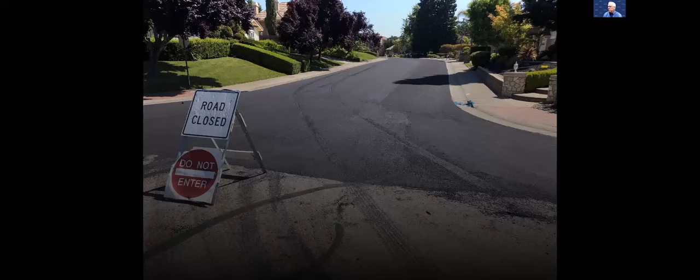This is one that should have been barricaded off completely. You've got a road closed sign out there and the do not enter. Not good. Looks like the BMPs are in place, which is good for the drain, but somebody was on the inside and the tracks are coming out. So nobody went from the outside in. They were on the inside of the project and came to the outside. You can tell by the track. So this is another one the contractor's going to have to fix and make sure it hits the punch list.

So striping. This is also part of the project and inspector's responsibilities. So read the specifications for proper striping. And some people are thinking, well, striping is striping. It's usually thermo or it's paint. Well, what is it? Is it thermo? Is it paint? Is it tape? Is it sprayed on thermo or extruded thermo? Which one is it? What about temp striping? Are you required to put temp striping down in between before you put the permanent striping down? So things you need to know and be aware of to get a handle on, and talk to the contractor before they even do anything.

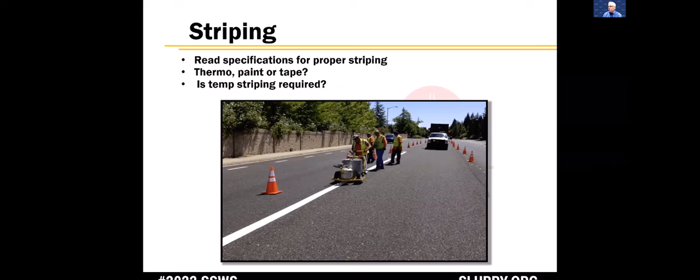We had one project I'll show a little bit later where they put down spray on when it's supposed to be extruded thermo. So that's actually this picture right here. What was listed in the specs? Our specs on this one were kind of vague. We just said thermo. We didn't say extruded or spray on. And by the time we caught them, I take that back. Ours did say extruded thermoplastic, but the contractor had done a Caltrans job earlier, and they did the spray on thinking that would be okay. And you can see the stripes in here. It's a little bit thinner of an application, but it's thin on the edges on both these pictures. And that's not what we spec'd out.

So I noticed this on my way to work in the morning. It's like, that stripe doesn't look right. And sure enough, it was sprayed on. So how do you mitigate that? If they put it down a little bit thinner, now you've got to come back and work with the contractor to mitigate that, because they didn't put down what we wanted. They knew it. And we got less of a product on the ground, because the spray on goes down thinner than extruded. So it's not going to last as long.

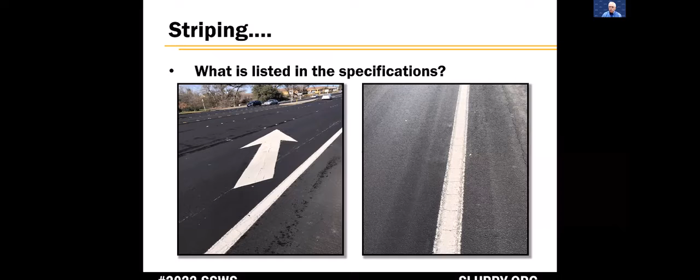So what we did is we just deducted some money for it. We didn't want them to grind this out and put it back, or even to go over it with another layer, because that would have been too thick and a little bit too costly at the time. So we left it down and just took a deduction on the overall project, or the payments, I should say.

So this picture is just to show how close you can get to the medians. Some of the striping contractors have a hard time getting that close. We need to get as close as we can to the median. Pay attention to that and make sure everybody understands how close you want it. That's where it was when they took it off doing the project. That's where it needs to go when it goes back. Another thing to look for is that all the reflectors are in place as well. Not just the striping's down, but you've got reflectors on this and the buttons that go with it. So just another example of what the finished product should look like, and the inspector should know.

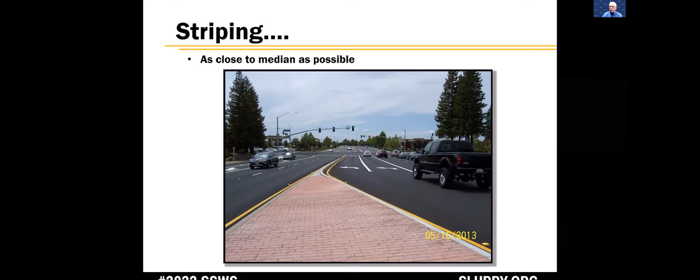So here's some temporary striping that happened on that same project. So what are the specifications for removing or covering up your temporary striping? You can see the striping in between. Do you need to remove it? So what happened was, this was a night project and we needed to get some temporary striping down. So instead of calling back his striping contractor, the paving contractor themselves went out and put down some striping. Well, they didn't put it in the right spot, obviously, because the permanent striping is laid out a little bit differently. So now we have these paint marks from just a regular spray rattle can of paint that they put down that you need to cover up, and that's up to the contractor to do it.

So we could have had them grind it out, but then what you're doing is you're ruining that nice microsurface mat, and you don't want to do that. Otherwise, they have to come back and re-slurry, and they don't want to do that. So in our specs, we account for a parking lot seal to come out, cover that up with as thick a coat as you can, and then put your permanent striping next to it.

My lights went out again in my office. Sorry about that.

So that's just one of the fixes, but this is what you end up with, and they need to cover all this up so it doesn't look so bad.

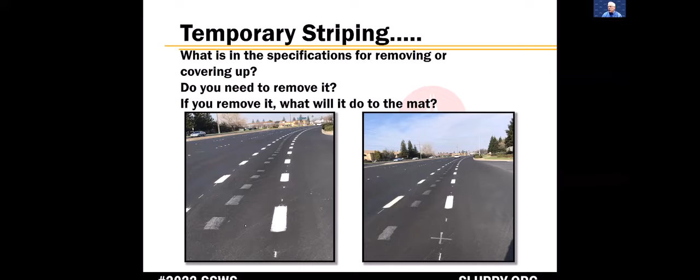Utilities. You need to talk about all utilities: drainage, water, monuments, sewer, whatever is out there in the street. Are all the utilities marked and accounted for? Have you looked at the plans to make sure they were, as a contractor, done that? Do they need to be raised or lowered?

When the inspector is going around looking at all the streets, and you notice some of these that are too low, you need to make note of that right away and make sure everybody knows that some of these utilities need to be raised, and bring that up so they can start doing it.

Survey monuments. Federal projects require all monuments to be surveyed and documented, and that's kind of what we're running into now. If we get any federal money, we have to go out there, and we've been hiring a separate contractor or an inspection company to come out and inspect them all, find them all, make sure they're all there. And if we don't see them, we need to make sure we get them added and raise them up to the top so we can see them there.

Just be prepared for that. That takes time, it takes money, and we usually do that a year or two ahead of time before the project even goes out. The picture on the far right is a manhole that'll be buried because we didn't find it. The inspector didn't see it, contractor didn't see it, or maybe they did, they just paved over it. This was an overlay project.

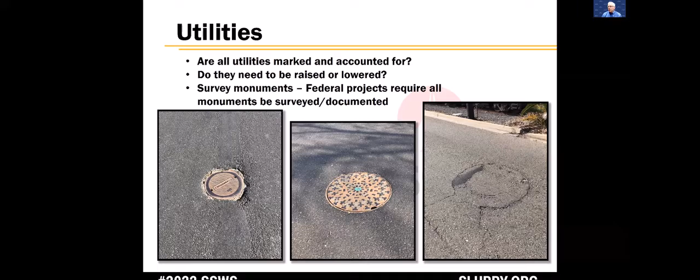And now the manhole's starting to come through. This is probably about 10 to 13 years later. And now you can see the outline of the manhole coming through, and it's starting to crack. It's just one that got missed and should have been picked up. Oops.

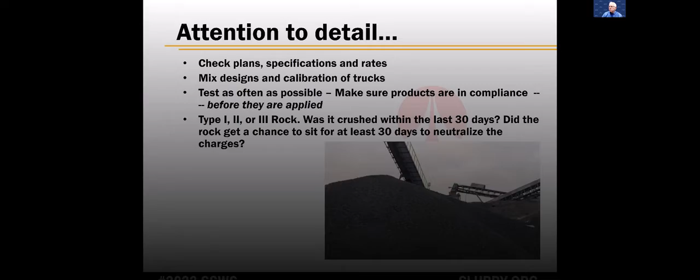So pay attention to detail. There's a lot of details in this project. Check your plans, your specifications, your spread rates. Check your mix designs. Make sure everything is getting tested. Calibration of trucks. Let me start from the beginning: the trucks need to be calibrated before they come out.

So a few days before the job is going to start, the contractor will bring a truck out, you do the calibration, and that's the same truck that will be out there when they start the job, and it won't be on another job in between. So make sure you're using the same truck that you calibrated.

If that truck goes down in between, and you're right in the middle of the job, you need to calibrate the next truck. So many times the contractors will bring out two trucks, they calibrate them both. If one goes down, they use the other one. So that way, you know it's calibrated for our job.

Test as often as possible. Make sure the products are in compliance before they're applied. Test material before, test it during. Take samples all the time. And we have a separate company that comes in and tests our materials. And the lab will take this. And if we're doing it during the job, at least we now have some samples.

So if the project fails 6 months, a year, 2 years down the road, we can go back and look at those samples to see what the materials were made of, and we know what went wrong and how to fix it. So type 1, 2, or 3 rock, whatever you're using, was it crushed within the last 30 days? Did the rock get a chance to sit for at least 30 days and neutralize the charges?

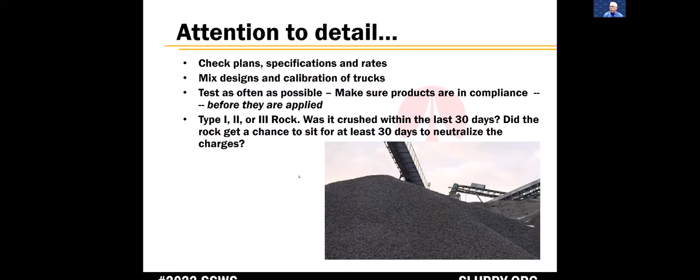But that is in the specifications, to make sure that rock has been neutralized for at least 30 days. So it needs to be covered in your pre-con meeting. Talk about it early. Make sure there's plenty of material on hand for the whole job. So attention to detail. Follow the specs. Sweeping, rolling, spread rates, just to name a few.

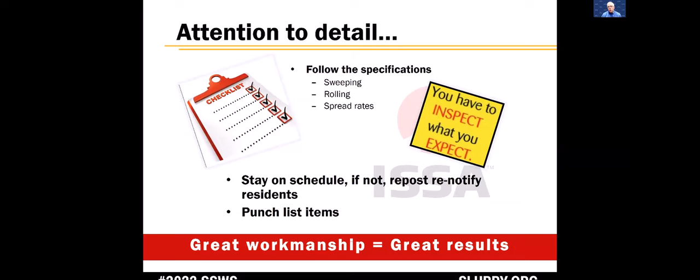Stay on schedule. If not, repost, re-notify the residents of what's going on. Create your punch list. Start your punch list from the first day. Talk to your contractor about it all the time. Let everybody know, and the engineer, what's going on the whole time. You have to inspect what you expect. With good inspection, the expectations will be met, and it should turn out to be a successful project.

Open lines of communication between the inspector, contractor, and engineer, like I've been talking about. Don't be an absent inspector. Show up every day. Show up on time. If you come to work every day at the same time, get your notes together, get in your truck, get out in the field, and be there on time when the contractor's firing up. Be there early before the contractor fires up.

A lot of times the contractors like to fire up the equipment before they're allowed to do it. Ours is 7 a.m. and sometimes they'll get there at 6. That's okay sometimes, but a lot of times it's not, because you're going to get the loud, noisy equipment, and now you're going to have neighbors complaining. So get there early and start talking to the contractor when they get there first thing in the morning.

Get help if needed. Add an additional inspector if the job is large and spread out. Some of our jobs do get large around two sides of town, or it's just a large residential slurry project where you're trying to count the trucks, take care of quantities and watch the mat or the material go down. Get an extra inspector out there. Have them help out for a few days while you need it, and then let them go back to whatever else they were doing. But communicate that. Say, hey, I can't keep up with this. It's a little bit too big right now.

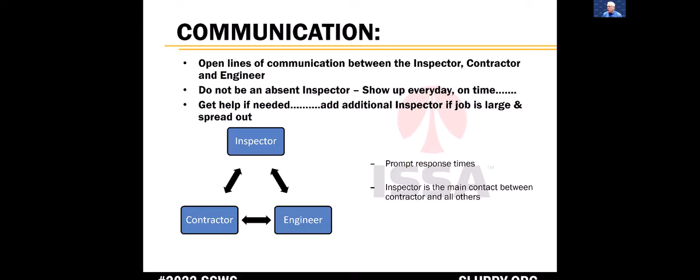Get an additional inspector. So what we've done is we've used some of our maintenance staff, and my lead workers go out and help once in a while, and it gives my guys great training and helps the inspectors at the same time. Prompt response times, and the inspector is the main contact with the contractor, like we talked about before.

So now it comes down to the punch list. You've got your job mostly done. They're trying to finish up. Document, communicate. You've been doing this all along. Your inspector's been doing this. Contractors should already know about most everything on the list. Share the list with others in the project. Everybody should know what's on it. There's no reason to keep it covered.

And then the contractor can start working on the list right away, like I've been talking about through the presentation. There's no reason they have to wait till the end. If there's something they can come back to and grab, get it done, fix it, that saves them a trip. The contractor will appreciate knowing what it is, so they don't have to make any special trips out later on after the project's completed.

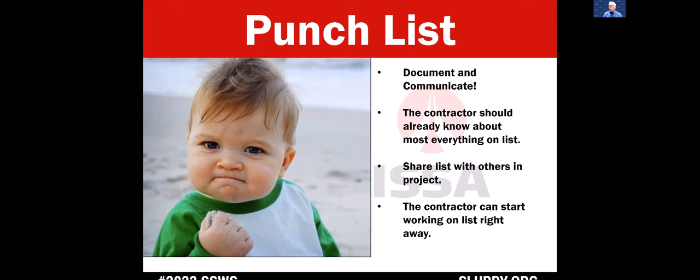So what should a finished project look like? This is a microsurface on one of our arterial roads. Look at the overlap on the edge. It's perfect. Right along the edge, they did a fantastic job on this one. Some of our crack seals come along a little more on the edge, which we shouldn't have done, but we did, and that's fine. Striping looks great. That thermoplastic extruded, nice and straight. Thickness looks good. The markings in the middle of the road look good. We used raised pavement markers. They're all there. Reflectors are all there. Everything is in place.

Look at the mat. The mat looks like this rich mat. It's got plenty of oil in it. It's not dried out, and that's what you want to look at. If it's getting a little bit dried out, you're going to get extra rock in the gutter, and that's something you don't want to see. And we're not seeing any shedding on this one. I know the sweeper hadn't been by before I took this picture, so this one did really well. This is one of the best looking jobs we've had here in many years.

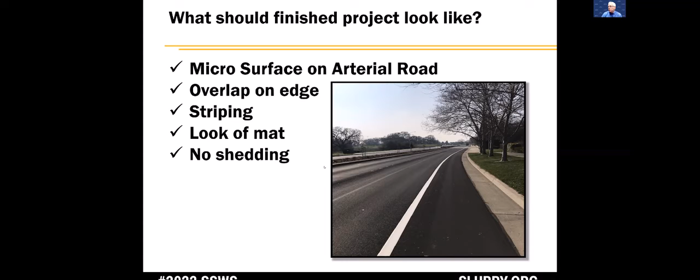Here's a successful microsurface on the Roseville Auto Mall. It was raining that day. I didn't want to take a picture in the rain, but I needed to get the picture in there. But we did the project during the summer, and this is like a big circle. A couple straight parts in it, but it's almost a big circle. And this is a type 2 micro that we put down. So we needed to make sure that micro set up in 45 minutes to an hour because we were on a time constraint.

We did the job at night because the auto mall did not want to shut down to do road improvements. They usually shut down about 11 o'clock at night. I think we got them shut down by 10. And then they had to open up again by 6. So we had about 6-8 hours to get everything done and do the whole project in one night. The contractor brought 2 trucks out. We tested the material 2 days before to make sure it was going to break in 45 minutes, which it did. So they did a fantastic job on this one.

And the main thing was, you can tell from the second picture, the cars, and the speed limit's 10 or 15 around here. Cars do 30 and 40 miles an hour. And we didn't want this to start coming off, peeling off, or even shoving or shedding. So it was very important we got this job right. This is the Roseville Auto Mall right in the heart of Roseville, and this is probably 30 to 40% of our income for the general fund. So we make sure this road is always in good condition and always in great shape for the owners of the auto mall.

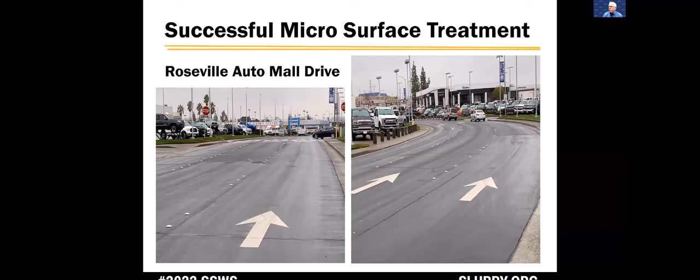Successful slurry and microsurface project. The one on the left is the collector street in a residential neighborhood. The one on the right is a residential street. Both of them are microsurface, and they both turned out great. One has all the striping in place on it, even for the speed bump coming up.

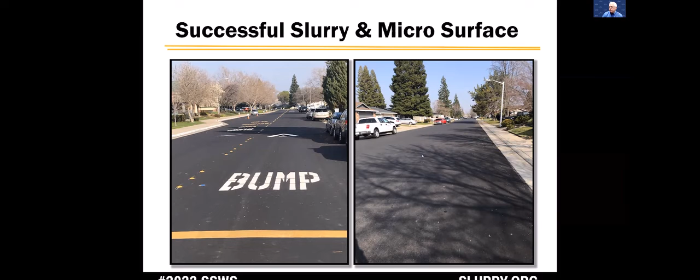The RPMs are in place, and then the one on the right, you can see the edge line on the gutter lip is perfect and everything looks good. This is a few years old, and the project's doing great. So that's what the project should look like, and that's what everybody should be striving for.

So let's go over a few benchmarks before we conclude the presentation. Communication. I'm not sure if I ever mentioned communication, but I'm going to mention it. Communication: clear, concise, complete, and consistent. Make sure you're doing it all the time. Make sure you're consistent, and everybody knows what's going on.

Solve problems as they arise. Do it right the first time. There's no reason to wait. Let everybody know about the problems. Get it solved. Move on. Don't come back to it. Shouldn't have to come back to it.

And then document everything. Pay attention to workmanship, your joints, the handwork, application and spread rates, calibration of the trucks. Make sure all this is done up front and you're watching this all the way through the project. Handwork is very important. The joints, the overlaps.

If you don't think they're doing it right, you don't need to go and tell the contractor, hey, you need to do it this way. Just say, hey, it doesn't look right. Maybe you need to change something, and they will take care of it. Rolling. There is never enough rolling. Make sure they're hitting what's in the specifications. If it calls for 6 rolls, 6 times, make sure you get it.

Testing of all materials. Make sure that testing is happening. Make sure it's consistent, and make sure you're getting it from the right spot. But the testing company will know. The engineering firm will know what to do and how to do it because they've done it before. So make sure it happens and make sure you document everything.